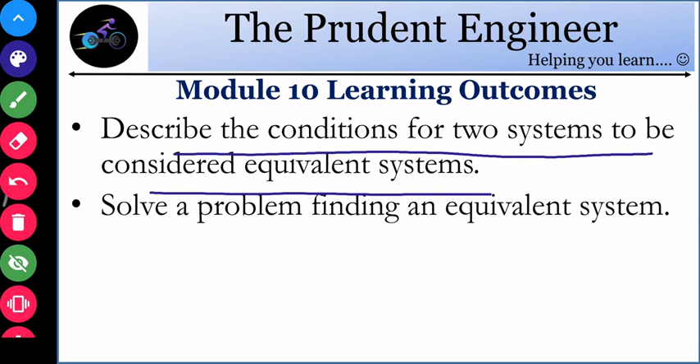In this module, we'll be learning how to describe the conditions for two systems to be equivalent systems, and we'll solve a problem to find an equivalent system. Okay, so let's start. So for two systems to be an equivalent system, the sum of forces acting on body 1 should be equal to the sum of forces acting on body 2. That is the first condition.

And the sum of moments about a particular point P, which is common to both system 1 and system 2, should be equal to the sum of moments about that same particular point P for system 2. Okay, so this is the condition for two systems to be an equivalent system.

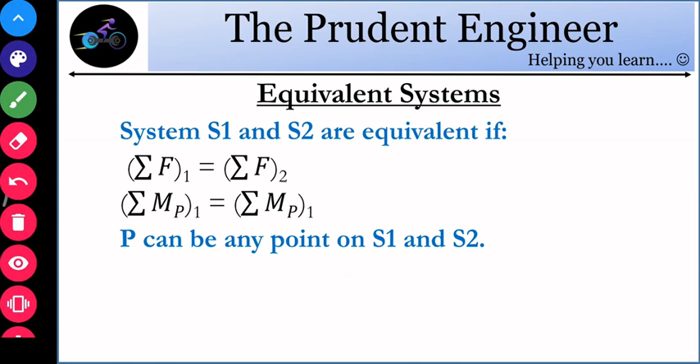Okay, so this is an example I have taken, and we have to find out an equivalent system at point C. This is the point C, suppose we define. This point, and this is point A, and this is point B. So first of all we draw a system 2. Okay, and this is the C point, this is system number 2, this is system number 1.

Okay, so summation of forces on system 1 equals summation of forces on system 2. So on 1 we see there is a force of 200 newtons in I direction and 350 newtons in J direction. That 200I plus 350J will be equal to the sum of forces in

the second system. So at point C we can draw a force of 200 in I direction and 350 in J direction. So that is the fulfillment of the first condition. Okay, so this is again what I have drawn. Now the second condition is we have to have a balance of moments.

So the moments on system 1 about a particular point C should be equal to the sum of moments at point C on system 2. So suppose this is point A and B. So if we take the moment about point C using these two forces, this is the position vector, suppose R, C, and this is A and B.

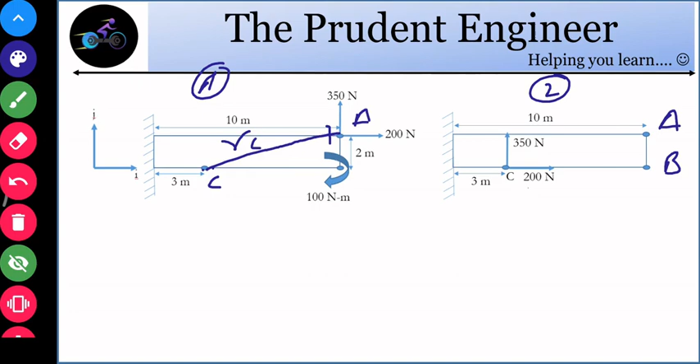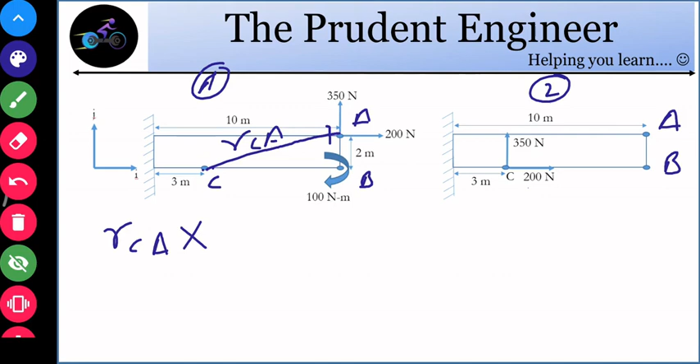So the sum of moments on system 1 should be RCA cross the force vector, and that should be equal to the sum of the moments in system 2. If you recall past modules, you will be able to do this very fast. For RCA you have to move 7 units in I direction and 2 units in J direction.

So 7I plus 2J crossed with the force, which is 200I plus 350J. Okay, so this is what we require this time, and we will find the cross product. That will be equal to 350 times 7, that is equal to 2450.

2450, and I cross J is the K direction, and J cross I is minus K, so minus 2 times 200, that is 400K. Okay, and we already have a moment of 100 newton meters. If you see, that is a clockwise direction, that means negative Z, so that is minus 100K.

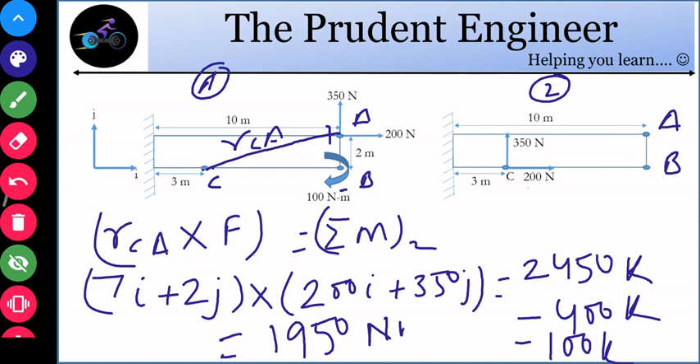So that gives us 1950 newton meters of moment about this point C. Okay, so that is again shown here in system number 2.

If you want, additionally you can find the resultant of these two forces, which is 200I plus 350J. The magnitude will be equal to the square root of 200 squared plus 350 squared, which will be equal to 403.

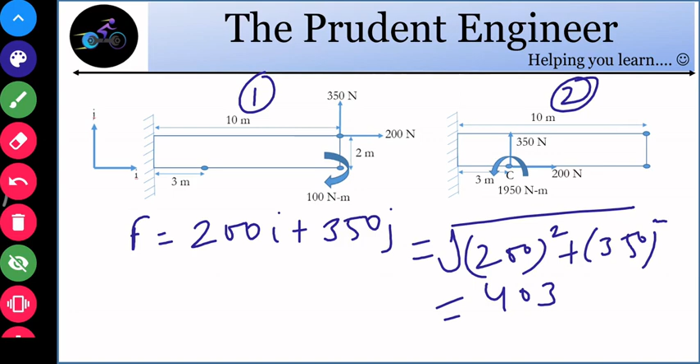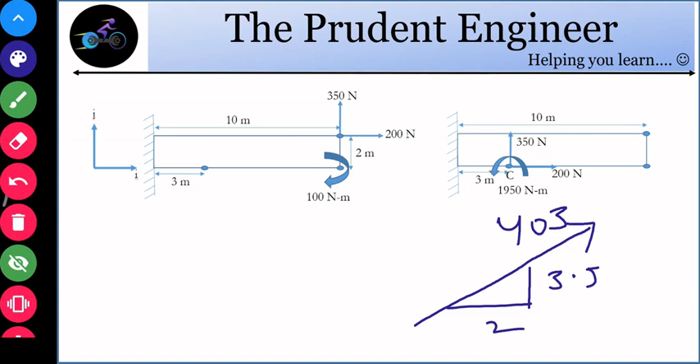And so you can simply write here that this force is of magnitude 403, at a slope of 3.5 over 2, because 350 over 200 is tan theta, so theta will be tan inverse of 3.5 over 2. So this is the final answer you will be getting, and this is the equivalent system.